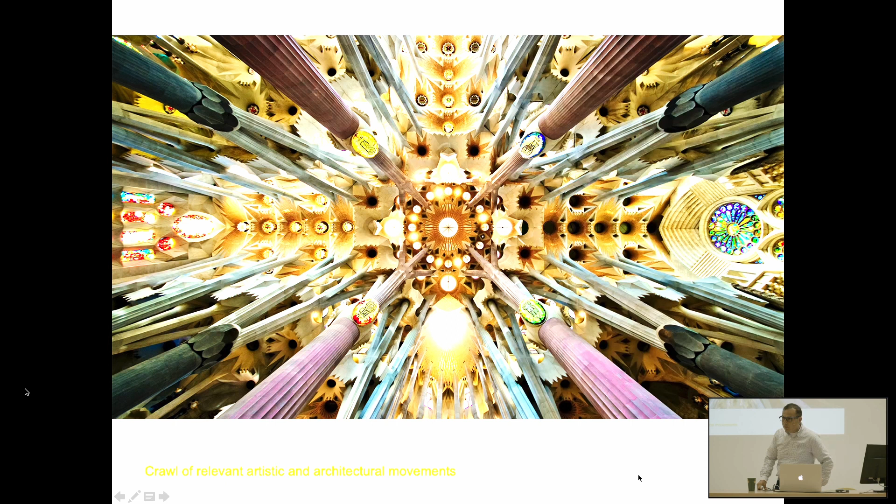The city, of course, is quite touristic. This is an asset, but at the same time it's a challenge for urban compatibility with other people. It has been for centuries a hub for the creation of art, both in architecture and in other arts. So the main artistic movements, the Art Nouveau, which we call modernism, took place in the city because the richness of the burghers working with industry and the money going from one hand to the other allowed these kinds of creations.

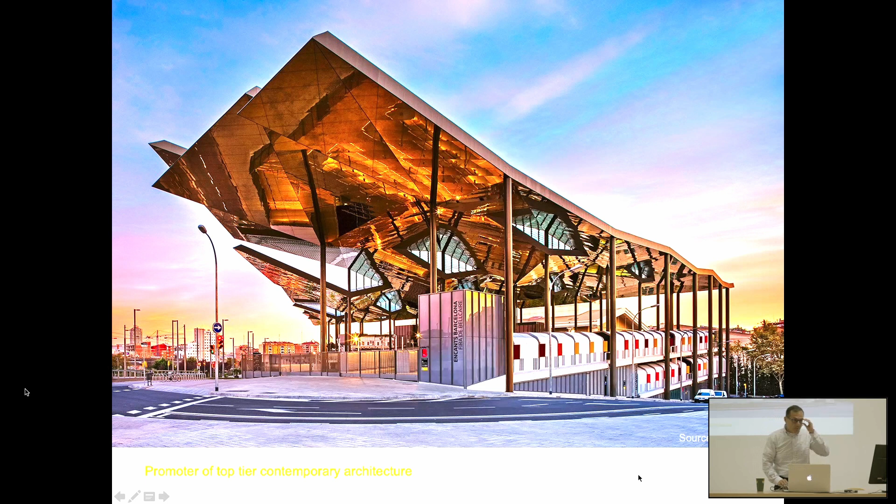Contemporary architecture is also important in the city, and the city council is very well aware of exactly what is being permitted in the city. There is a quality board that allows or not the production of new premises. So it is not only about the past, but also the present architecture.

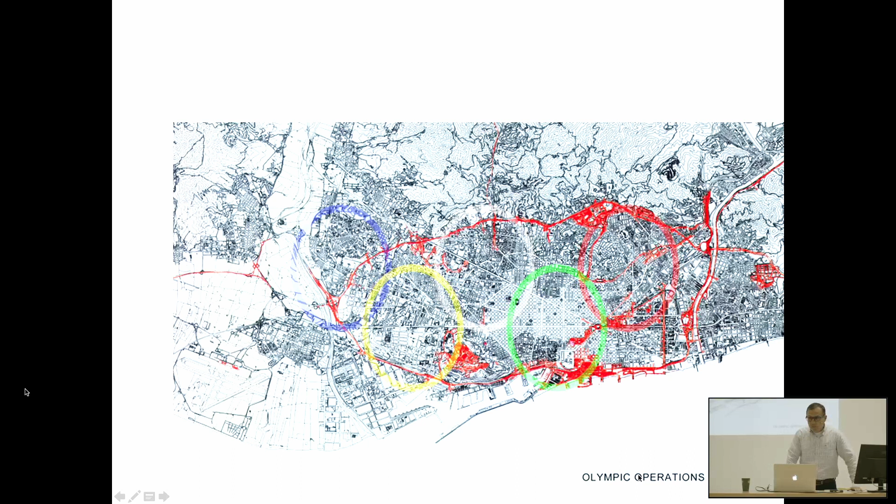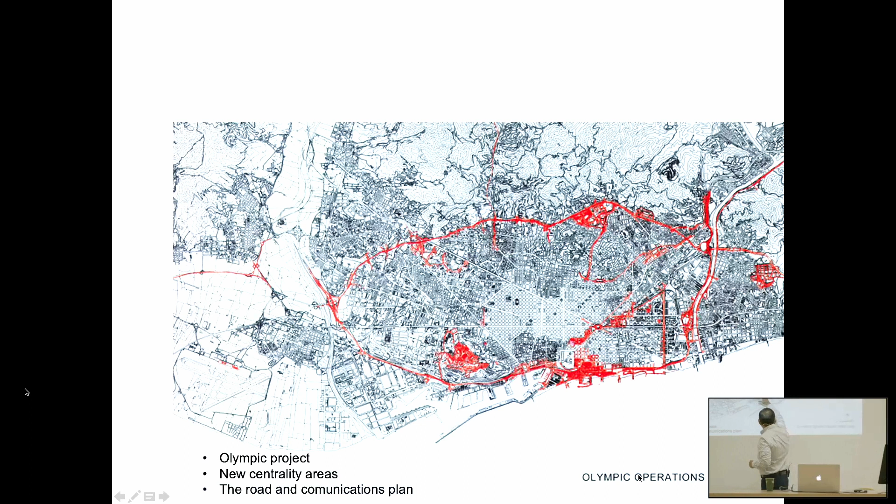But Barcelona is basically known in the urban realm because of the huge transformation that occurred almost 25 years ago during the Olympic transformation, which comprised basically all the central municipality, producing new connection systems, new sports areas, opening the city to the sea, and transforming the greater Barcelona we inherited from the dictatorship era. Before 1975, there were an overcrowded and poor center and suburbs that were quite disconnected from the city center. It produced a spectacular change, removing slums, opening the city to the sea, and creating new spaces. And everything packaged in 6 years.

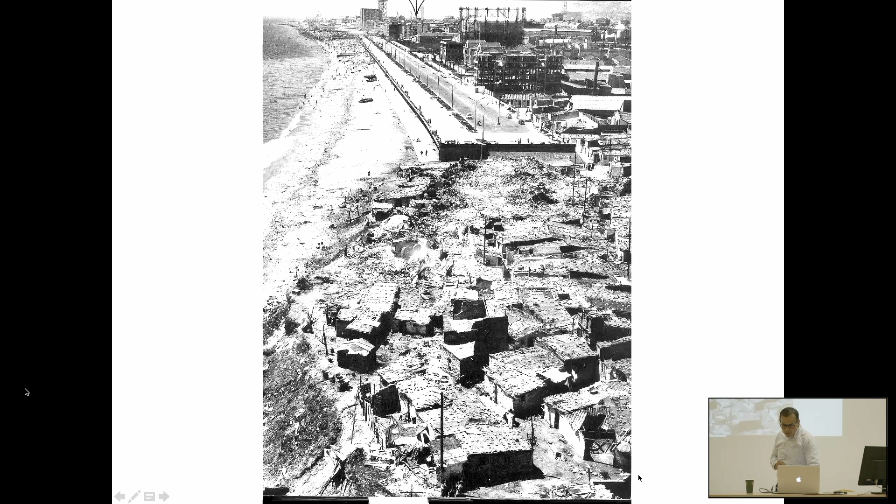So the city was impressively transformed in just 6 years with the efforts of architects, urban planners, and funding coming from the European Union, the central state, I mean Spain, and of course the city council credits and the public-private partnership. So this is the basic core of the success of transforming the city in just 6 years.

Barcelona received for the first time in history the award of the Royal Institute of British Architects, because normally this award was granted to architects, but for the first time it was granted to a city. Not only individual works, but collective, integrated works, so the city became quite popular in urban terms.

But this regeneration that occurred during the Olympic Games went beyond. During the Olympic transformation, talking just about the waterfront, it comprised the transformation of the old port into a leisure port, the opening of all this industrial area and producing the Olympic Village, creating super blocks accommodating housing here, also a new port for sports activities, new green space along the beach, and complementing, let's say, the fabrics.

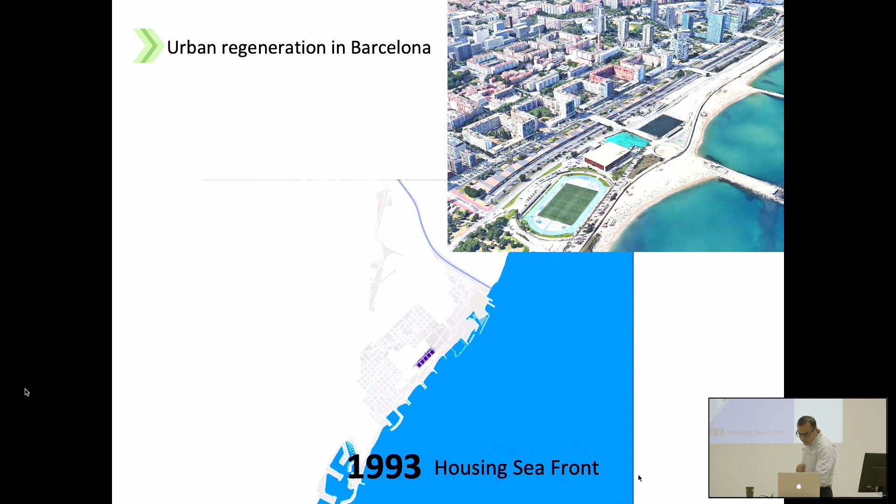And again, the recovery of public space, for example, by opening the Diagonal Avenue from the Cerdà plan, that you know is the main layout of the city from the middle of the 19th century. The Diagonal Avenue, which is one of the three very important urban axes, this is one, the Meridiana is the other, and here we have the Paral·lel and the Gran Via, was not open until 1996.

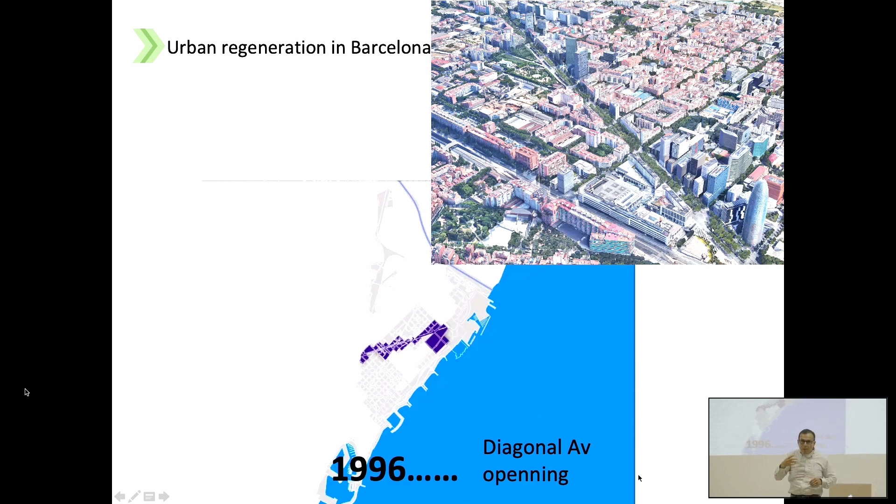So in this area of regeneration, the idea was to create a new Diagonal Avenue with a central, let's say, green space, like a kind of linear park. And all this huge opening was self-funded by selling the plots that were together. So public money was not used to produce the ending of the Diagonal Avenue.

Introducing, of course, new transportation systems that had been abandoned before, and creating new spaces for culture, greenery, of course, in a city that requires such kind of facilities to protect from heat waves, and producing new clusters for offices and culture. The transformation continued in 2008 with the arrival of the high-speed train.

High-speed train in Spain comes from 1992, joining Madrid with Seville, where the Expo happened at the same time as the Olympic Games in Barcelona. So 1992 was an important year for Spain, two international events occurring, one in the north, the other in the south. But the connection between Madrid and Barcelona occurred this year, so they decided to build a completely new train station, especially for this transportation system, along this manufacturing area, which is La Sagrera.

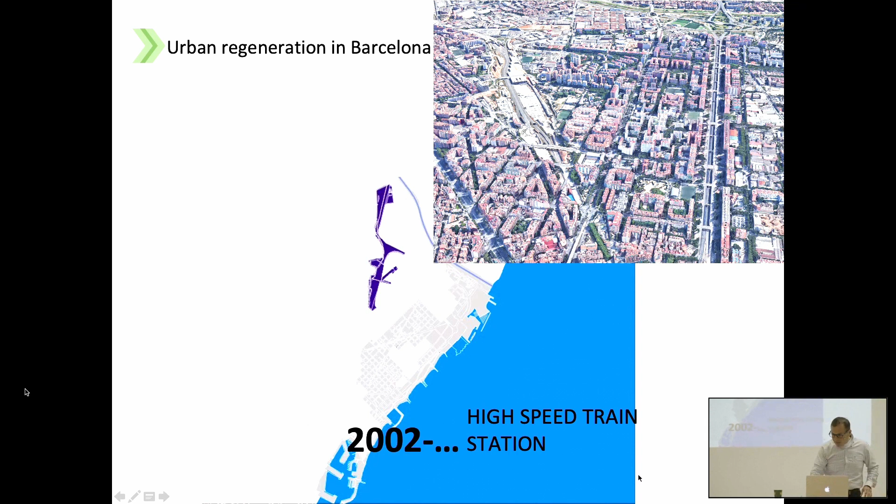So the idea is to put all the railway underground and to free this space, creating a linear park connecting basically the only central park we have in Barcelona, which is quite small but quite accessible from the city, with, let's say, the river, which is over there. So this is the main idea for this Sagrera train station that is now still under construction because it's a huge, pharaonic investment.

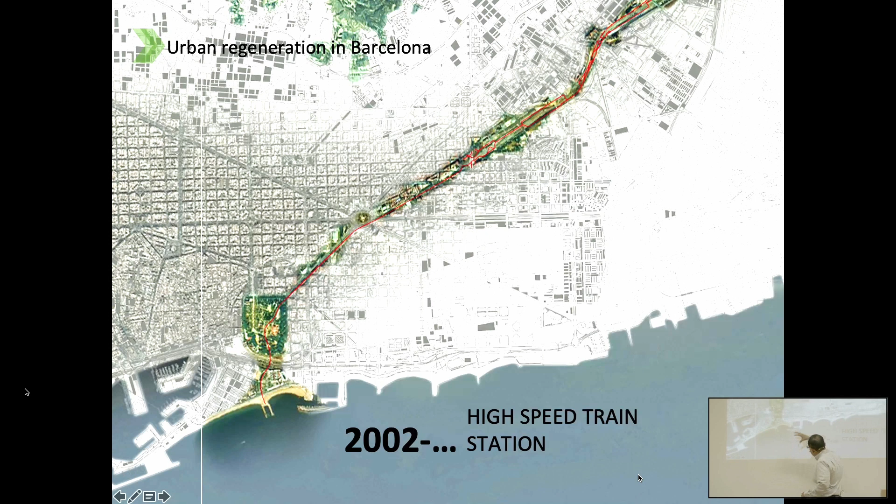Perhaps one of the failed projects we have in the city is the Forum of Cultures. Since the 19th century, Barcelona has hosted two international fairs, one at the very end of the 19th century, the other in 1929. So the transformation of the city has always been linked with these international events since the 19th century. I mean, this central park, as I was explaining, was the venue for the first international fair. So the Olympic Games, again, allowed the city to be transformed.

So the city created a new international event. It was called the Forum of Cultures. Basically, it was gathering different cultures from the world, celebrating diversity, the languages, and different ethnic features. So they took advantage of this event to transform the last part of the waterfront, where three main facilities were located: the sewage treatment plant that was here, the energy production plant, and the ring road that was built during the Olympic Games.

So it was a complicated project because of these large infrastructures, so they decided to build a square that goes above the infrastructures. But this is a square without greenery, of course, without trees. It's kind of dry, hard. It's quite apart from the city, so the life never came as originally planned. Basically, it's, let's say, a derelict space. It's not really a successful project.

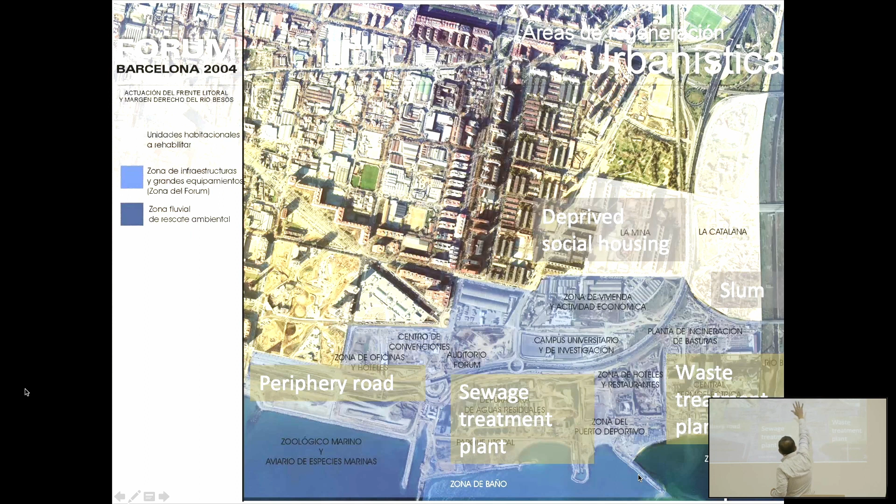But the idea was nice because in this area of the city, we have a huge housing estate that was built to accommodate migrants coming from the rest of Spain during industrialization. And this area eventually became quite dangerous, or at least was perceived as quite dangerous. So what they decided to do is to transform not only the waterfront, but to produce permeability through this estate, this deprived social housing.

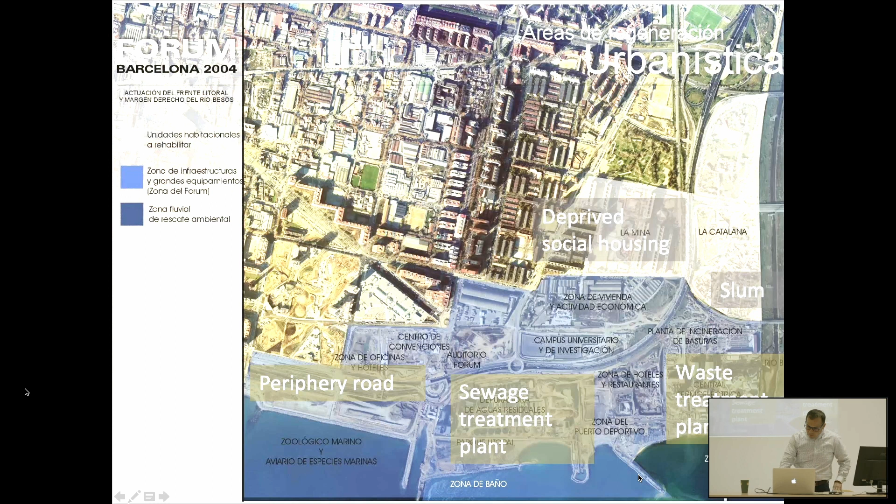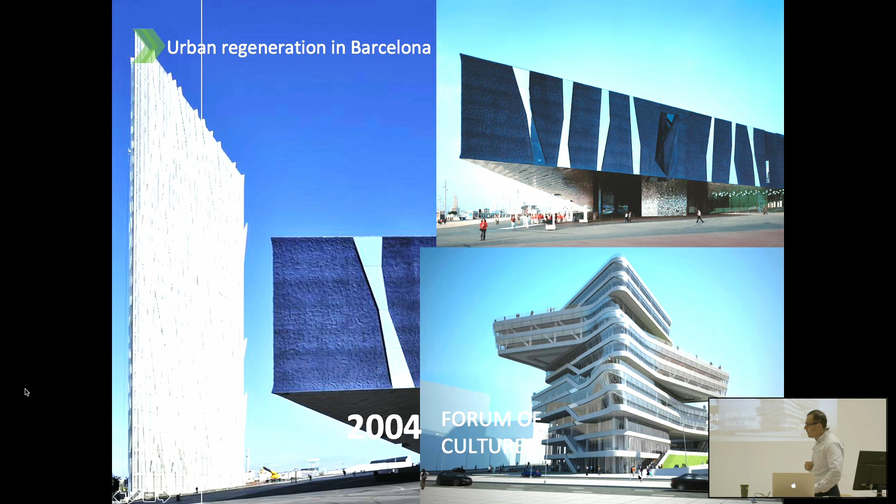Bringing to the area not only spaces for leisure, but also for culture, such as this building from Herzog and de Meuron, which is a museum, the Natural History Museum, or, for example, the Hadid building for my university that was never built because of the overpriced budget it implied. But the idea was to diversify the land uses.

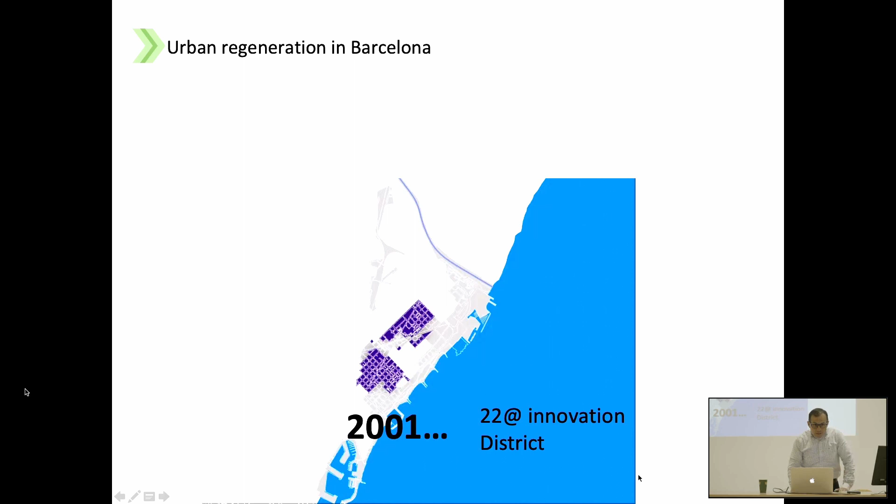So we arrive at the very center of the regeneration area, the largest regeneration area, the 22@. But what exactly is the 22@? In order to answer this question, we have to go back 200 years, just when Barcelona started to be the industrializing point in Spain. Before the Cerdà plan was designed, basically the city was constrained to the walls.

Here, more or less, lived 200,000 people. But at the same time it was empty, building was not allowed because it was the defensible area for the city. It was forbidden to build. So small villages start to appear more or less 3 kilometers away from the walls.

Sants here, you see Sarriá over there, Gracia here, and this, which was the new town, Poblenou, in San Andreu, where the Sagrera is. Barcelona started to transit from a manual or handcraft textile industry that was quite well implemented to a manufacturing one. Basically, coal was imported from England, arrived at the port of Barcelona, and fueled the new manufacturing plants being implemented here.

This happened for three reasons. First, it was forbidden to install steam engines inside the walls—they were quite dangerous, they could explode, and were not well enough designed in terms of security. Second, the land was very cheap. And third, there was water—kind of wetlands existed there.

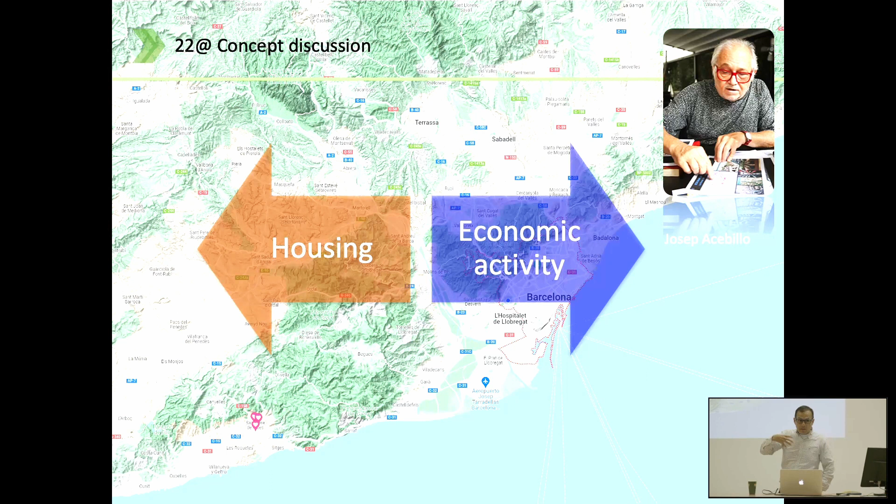The other hypothesis was to transform this economic core into a new economic core, more in line with the new activities emerging at the end of the 20th century—basically related to innovation, new ICT technologies, financial information, and high added value services. Josep Acebillo was the head architect in Barcelona at that time, and he was basically on the side of the economic activity, and he convinced politicians to go that way.

So the 22A, which is the code for urban planning for manufacturing, transformed into 22@, with the idea that this new electronic, dematerialized economy could land in the city. In order to transform the area, they basically followed an approach based on urban planning, but also an infrastructure plan and a management agency—all three pillars were required to produce this transformation.

Manufacturing plants were not allowed, so only new activities were allowed, basically located in buildings like offices. So basically an office district.

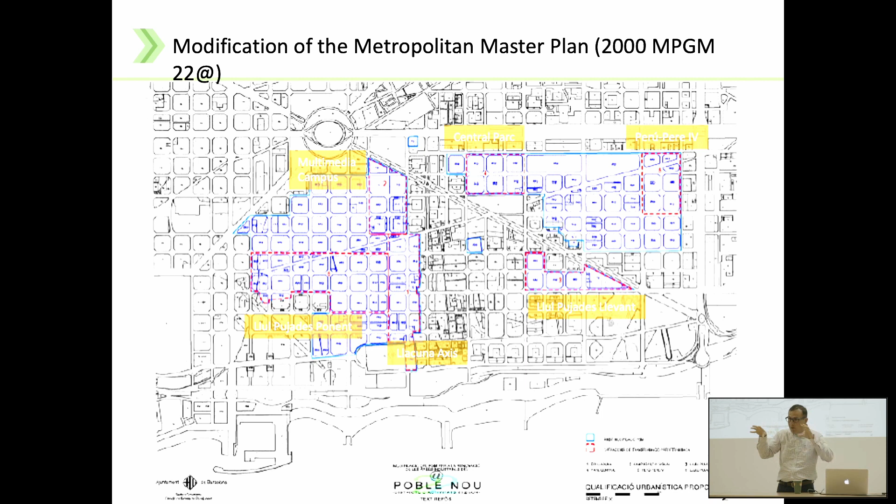Here you have more or less a perspective of what the 22@ area is and the main figures. For example, at that time, all the floor space for offices in Barcelona, in the metropolitan area, was 4 million square meters. So the 22@ provides another 4 million. That means doubling the space for offices for these new activities, providing 100,000 new jobs.

This is very important, because by providing new jobs, you make Barcelona more important for the structuring of the metropolitan system. More people can come to work in Barcelona, especially because, as I said previously, housing was not plentily allowed. So basically these people have to come from other parts of Barcelona or from the metropolitan area. So it implies reinforcing the centrality of a city that is already central.

Of course, being a manufacturing area meant that some services for people were completely absent, such as facilities or greenery. So the plan managed to provide those features, and also provide public infrastructure. The only housing allowed in the area was social housing, in a very small percentage. We are going to see that after.

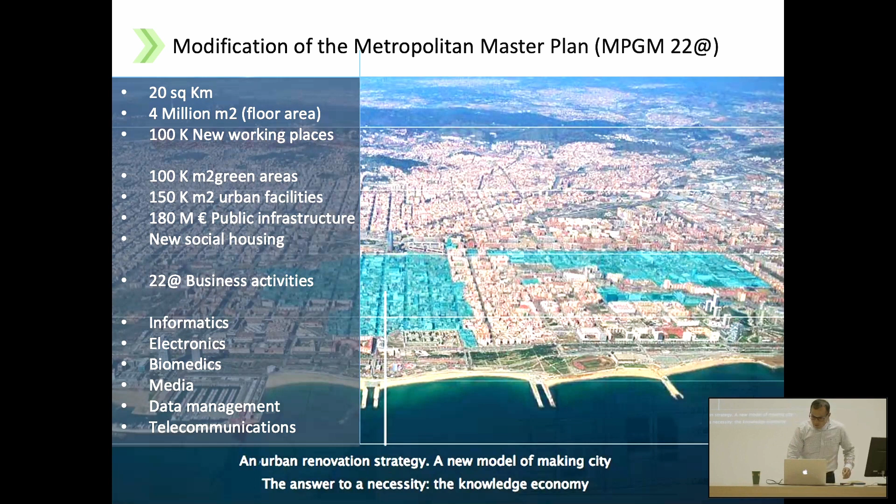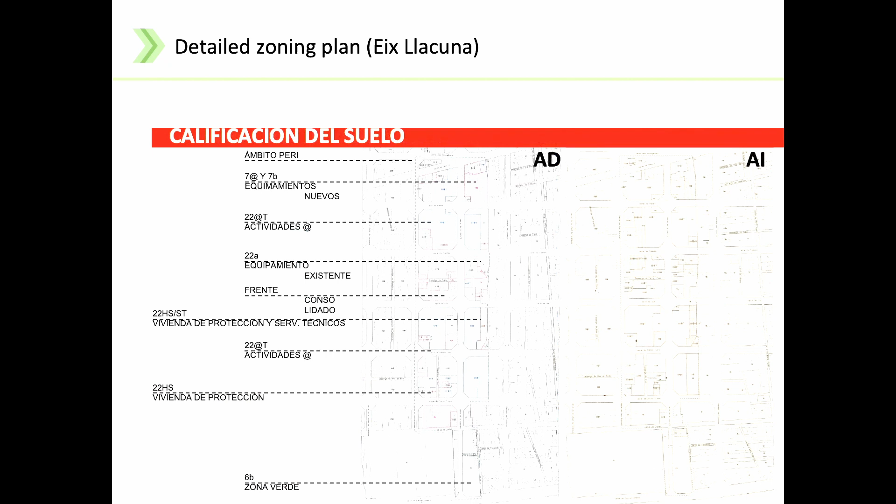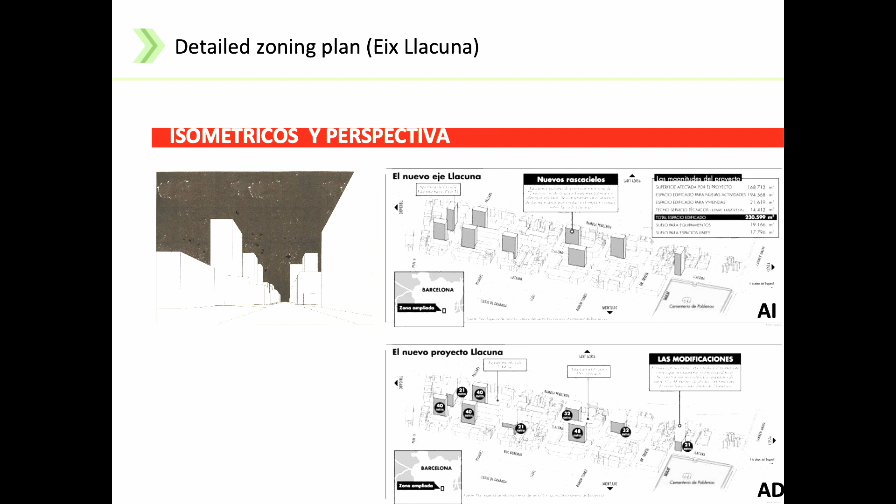Here you can see how the detailed plans looked 23 years ago. This is the Eix Llacuna, an important historic street, detailing all the land uses and how the volumes of buildings should look, with strong opposition from local developers, finally managing to produce more flattened schemes. In order to support these new activities, it was necessary to produce a huge transformation of the public space but also to introduce state-of-the-art infrastructures.

The problem was that most of the streets were not open at that time. The manufacturing plants were occupying the space that was devoted in the Cerdà plan for streets. So one of the main issues to overcome was to open these new streets, but also taking advantage of their creation to provide, in some cases, pedestrian areas.

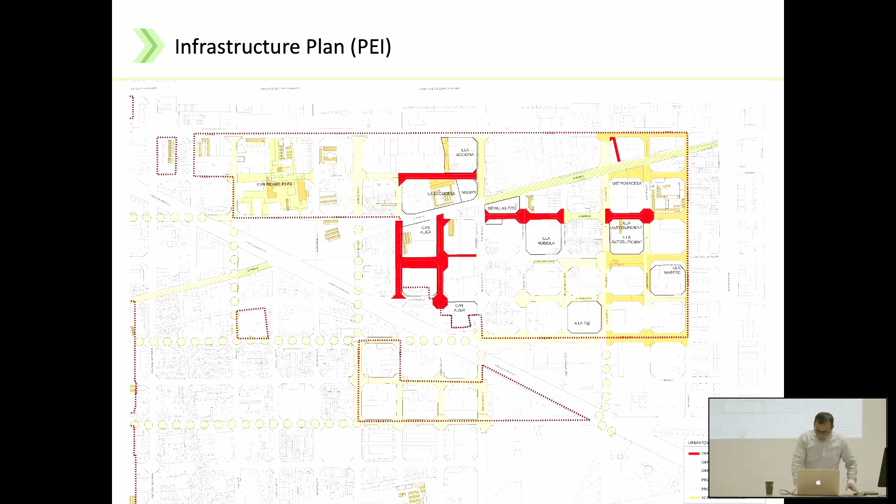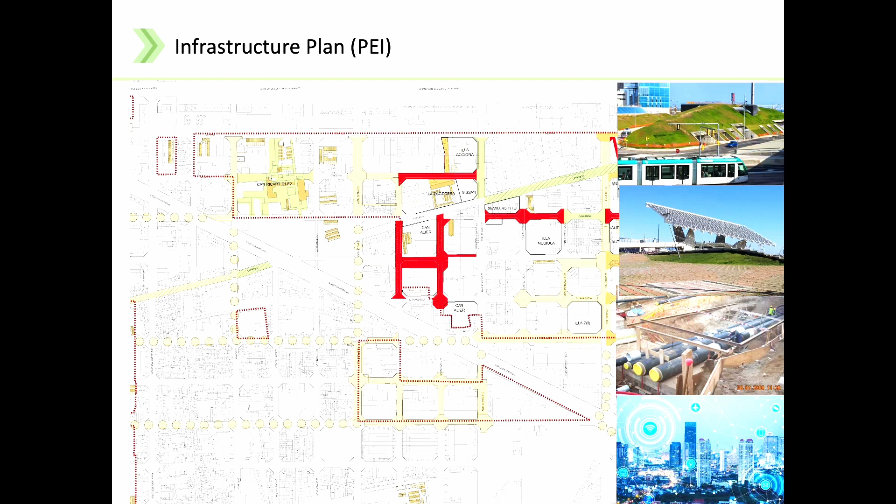It was necessary also to introduce new infrastructures, for example to provide water, hot and cold, taking advantage of the garbage processing next to the energy generation area. With the burning of the garbage, hot water can be produced in order to heat the buildings. This is quite common in Central Europe, but quite uncommon in Spain. Also for cold water, in order to avoid having chillers in each of the buildings and produce more efficiency by concentrating the infrastructures.

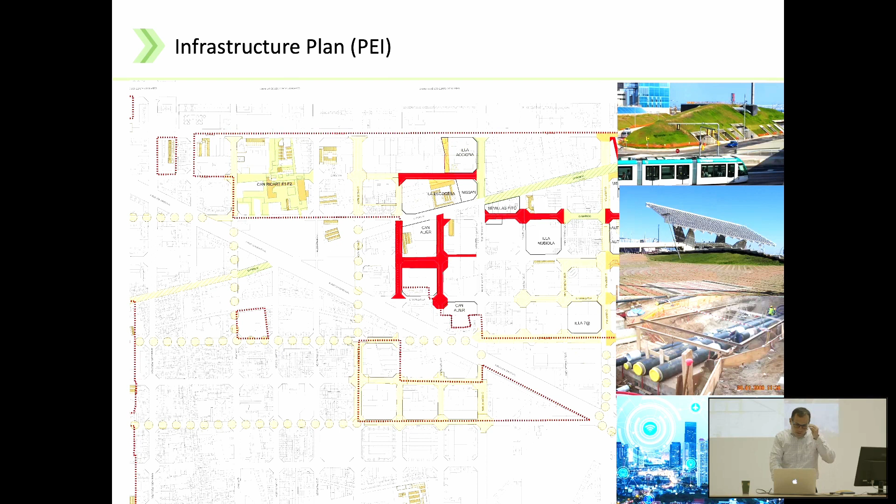Of course, it was also necessary to introduce optic fiber, but huge optic fiber. I mean not the conventional one, but what they call the dark one, that has a wide bandwidth.

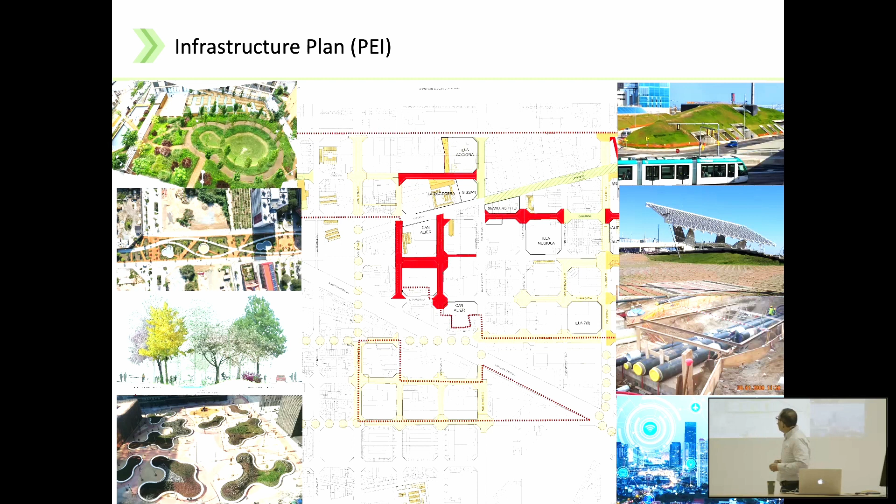Introduce new greenery, taking into consideration new trends, basically related to the consideration of green areas as an ecosystem service. Not only space for leisure for people, but also providing services to nature, to diversify the insects, birds, different animals that were already not present in the city, allowing infiltration of rainwater, which is small in Mediterranean areas but very important to recover the underground water, and introducing all these novelties in the design of the public areas.

And all this huge investment was paid by private entities. This is quite important: public money has not been used to provide all this infrastructure. We're going to see how, after.

In order to attract new firms and promote the new district, a public company was implemented, which not only did kind of marketing, city marketing of the area, but also sped up the process of detailed planning and management. We're going to see what I refer to as land management. It also supervised the infrastructure provision and managed all this huge transformation in a relatively small lapse of time.

So how can privates, original landowners or developers, afford such a huge quantity of money necessary to transform the city? In Spain, basically, we use land readjustment. It consists of merging all the original plots and producing a new urban structure on one hand, and allowing the landowners to be the owners of the development rights. In order to have these development rights, they have to pay for infrastructure and public space. So in that way, public money is not used for creating new spaces.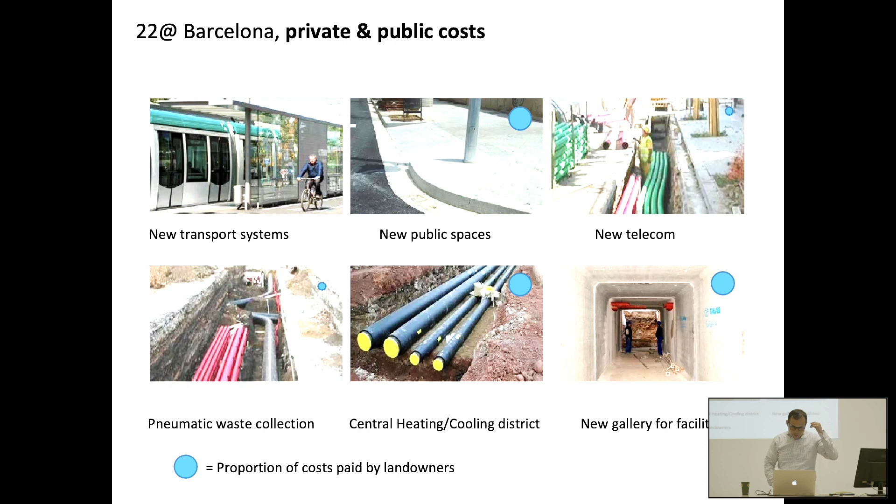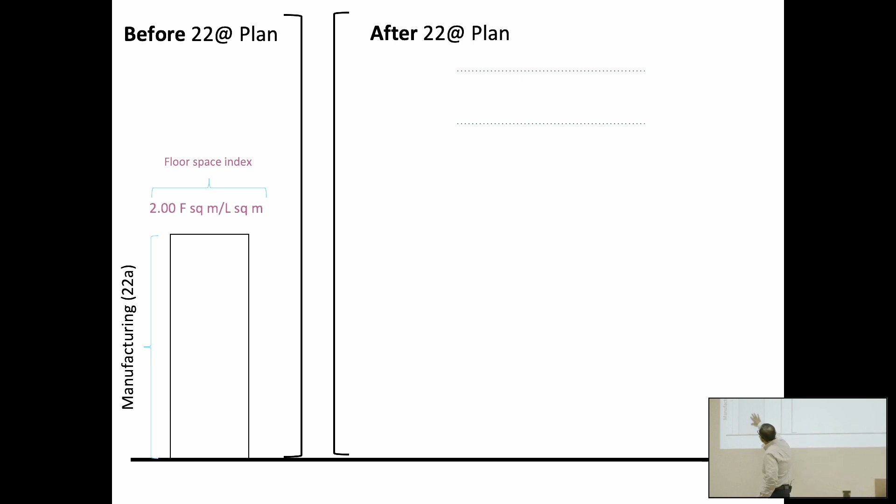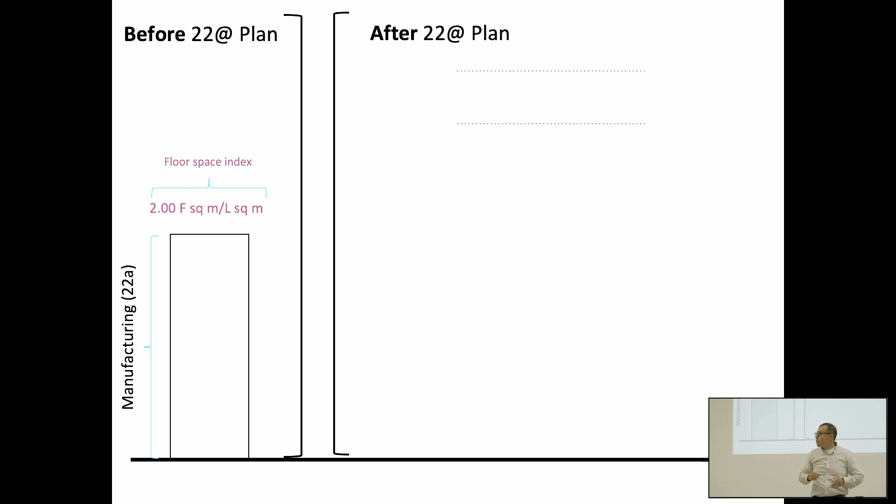So privates have been in charge of providing these services, as I have said before, and in order to allow this feasibility, the analysis or new land uses consisted of this transformation. Originally, in the 22A, the industrial area, it was allowed to build 2 square meters of floor space per 1 square meter of land. So the floor area ratio was 2, only for manufacturing uses.

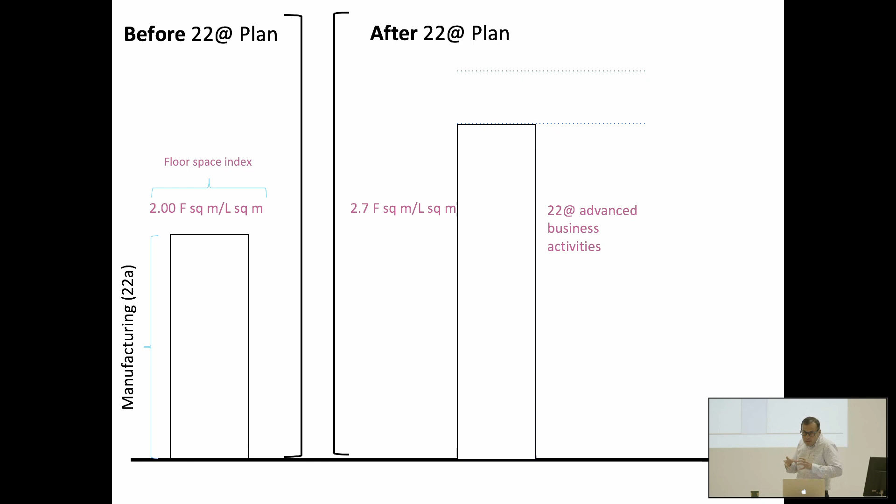So in the new plan, the 22@, it was possible to build a floor area ratio of up to 2.7 for business and 22@ activities. Just by changing the land use, given this additional 0.7 square meters of buildable land space, it was enough to pay off the transformation costs.

But the City Council decided also to have social housing. So 10% of the new floor area ratio was devoted to social housing. I mean private housing was not allowed, only in the industrial buildings.

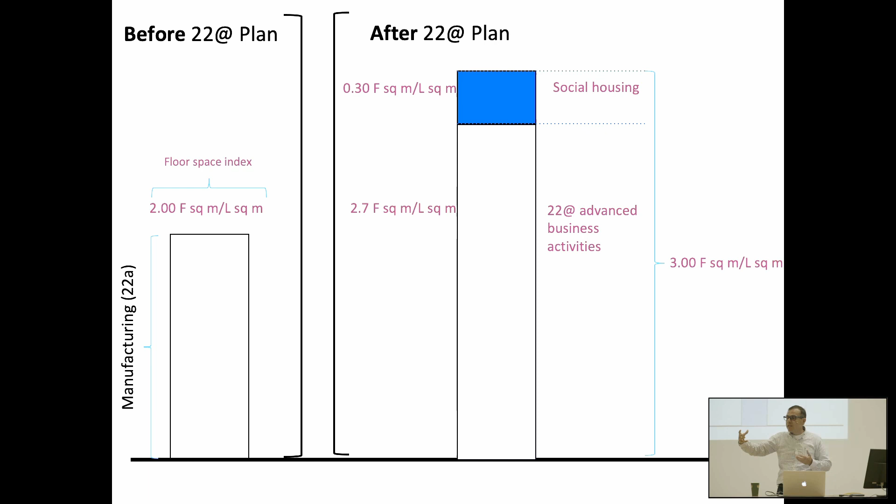In order to foster and incentivize developers to maintain these industrial buildings, private lofts, which work much better in the market than normal flats, were allowed. So in that way, developers have more economic incentives to invest in preserving the manufacturing plants.

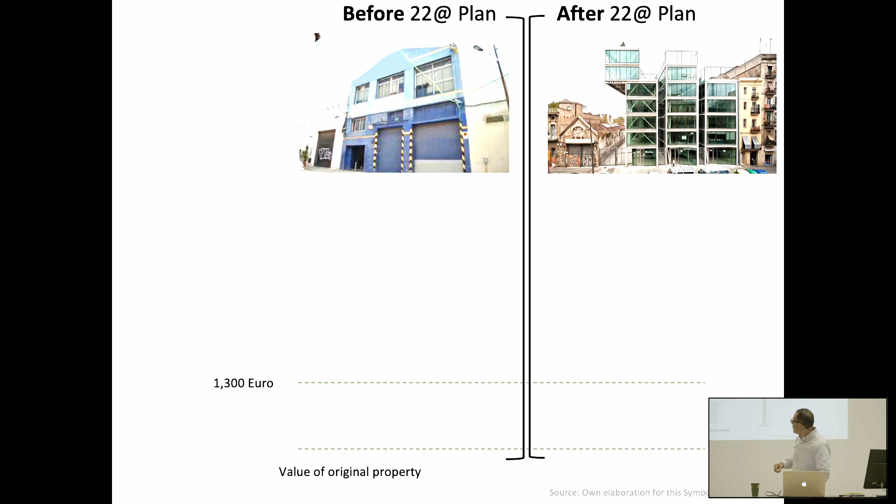So basically here you have an analysis of how a traditional small warehouse can be transformed. Don't pay a lot of attention to the numbers, but the main idea is that despite landowners having to pay for the transformation, there is still room for gains.

The original value of the land, manufacturing land, is this. The final value of the land after transformation is this other. Landowners have to pay for transformation costs on one hand, but also have to share part of the gains with the City Council. So the City Council is not only receiving streets, parks, new areas for facilities, but also receives part of the property rights. So the city becomes richer.

All for free. And there is still room for private gain, which is this area that you see here.

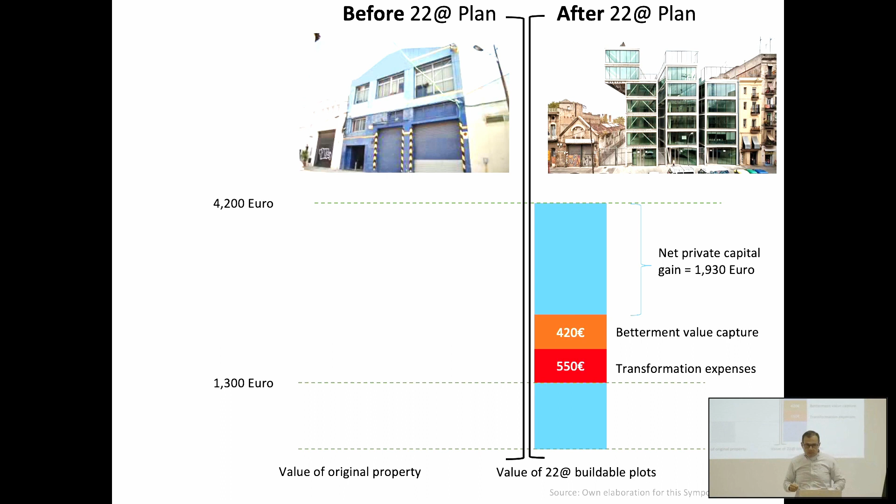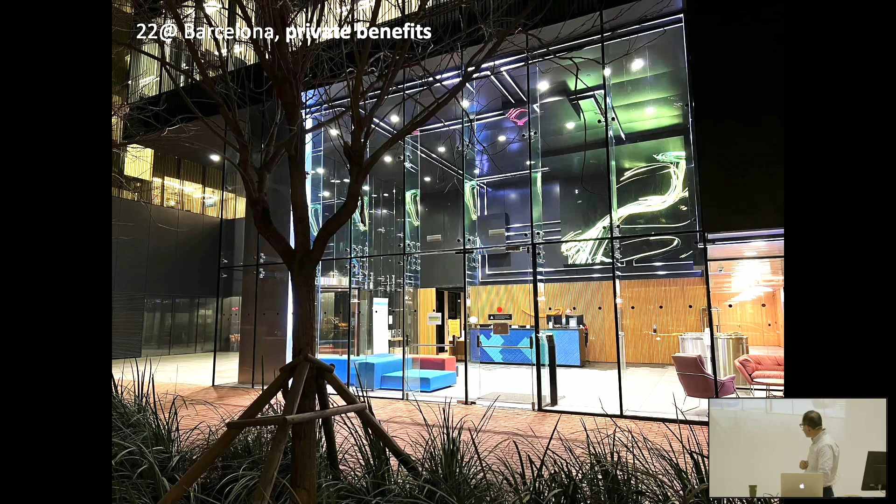And that's the reason why, in a relatively small lapse of time, the 22@ has been enormously transformed. New offices, areas for studios to record videos and create new electronic leisure offices, traditional offices for finance, lawyers, engineers, architects. Video games, as I explained before, have appeared with a reasonable quality in terms of materiality but also architectural design. New firms have been installed here.

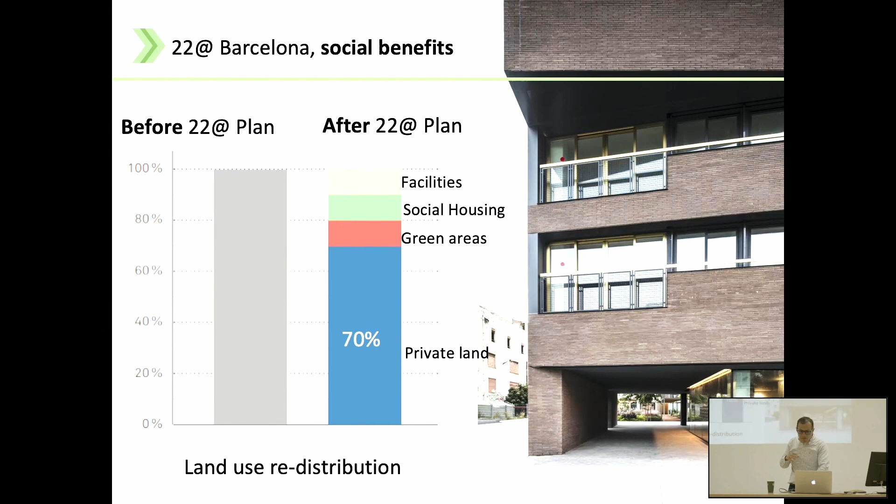Also, it was necessary to diversify the grounds. In the original buildings, as we can see here, the building arrives and at the ground level nothing is happening. And it kills the city. When you have an office building that arrives at the very ground, the very basis, and nothing happens, it kills the city automatically. So they have transformed the regulation in order to diversify the land use mixture at the ground level and produce a more interesting city.

Increase, for example, activities that are related to the gender perspective, to ease the daily life basically for women who take care of children, but also elderly people, allowing that jobs and different services required for these cares are close to these new homes. To create a kind of civic axis, basically which we're going to see, and to transform some streets into green axes. We're going to see what exactly that is—maybe it's the main innovation in terms of public space.

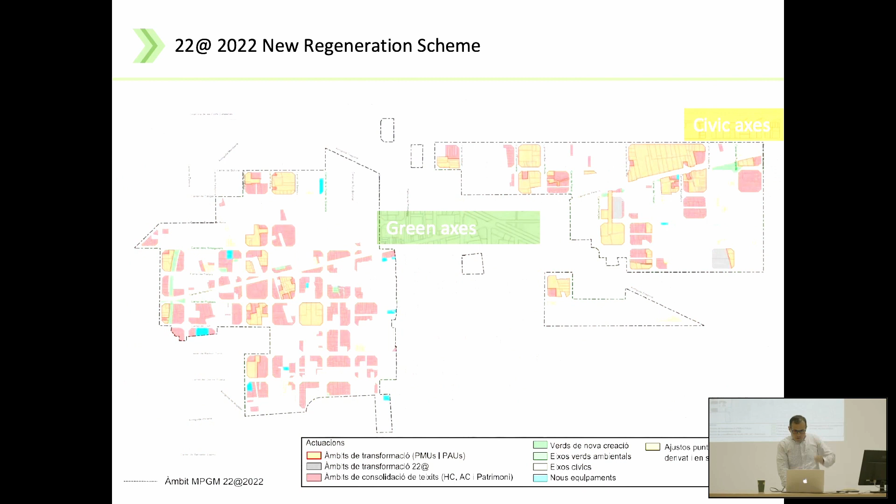So basically the idea in the 22@ is to completely remove car traffic, each three blocks in one direction and each other, to connect the beach areas with all the fabrics and the river in this area.

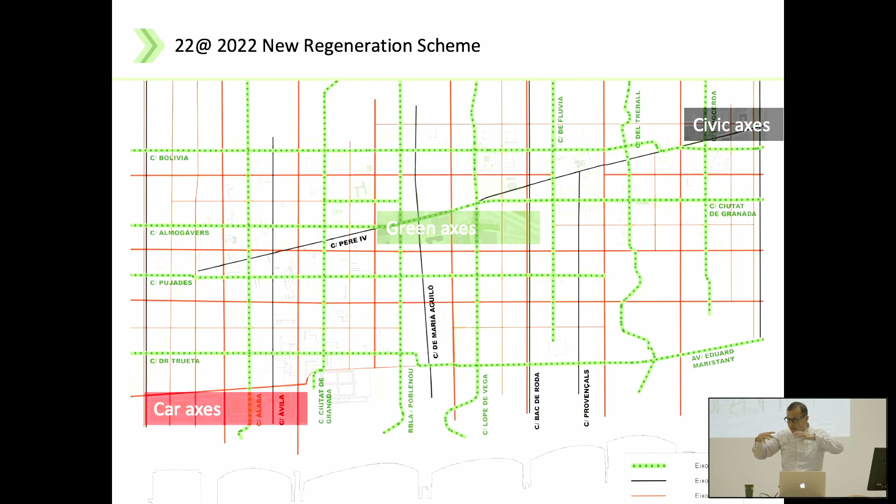And to produce completely pedestrian streets where the canopy is larger, contributing to reduce the heat island effect. So the idea is that at least 70% of the surface is covered by this canopy during the summer, of course.

In winter, those are trees that lost the leaves in order to allow the sun to heat the buildings. And of course, here only pedestrians and bikes can access, as well as service trucks.

In some cases, in these cases that are more central, to reinforce, as I have explained before, the uses for daily life. I mean, jobs that allow people to go into the public space, cafeterias that can informally, more spontaneously, go and occupy the public space.

I mean, the use of the public space is not very prescribed. There are areas where people can go shopping, which is very traditional in Spain, with this trolley. They go and bring the shopping and give life to the streets.